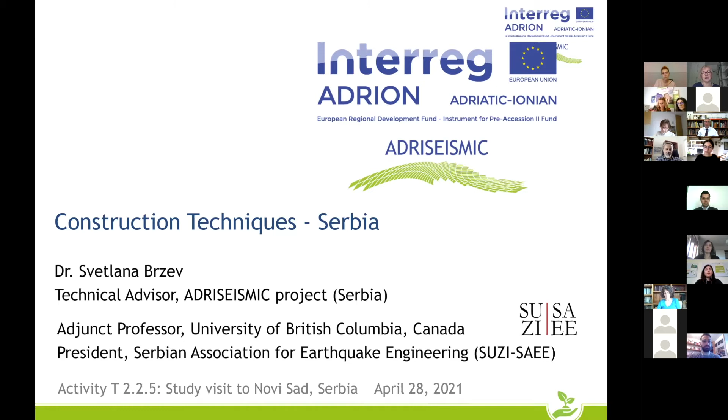So I will be giving a short presentation on an overview of construction techniques in Serbia. In this project, I'm mostly involved in the work package WPT2 and was contributing to the documents. The purpose of this presentation is to be short because we try to give longer details about Novi Sad, so this is a little bit of an overview; some of the content is already in the documents that have been published by the project.

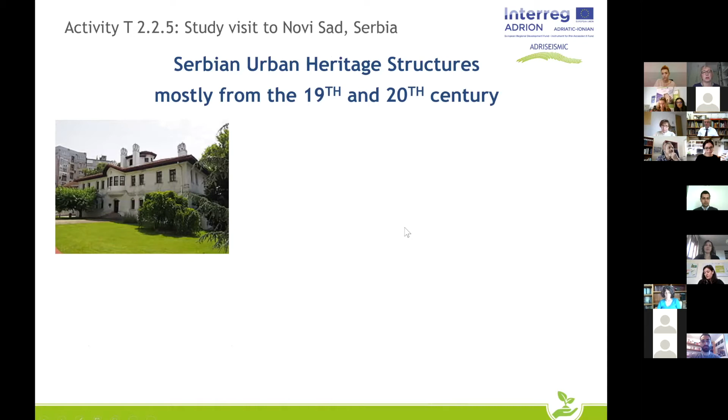As far as Serbian urban heritage structures are concerned, they date mostly from the 19th and 20th century. There are some examples of older buildings, but most of them were demolished, because Serbia has a rich cultural heritage, but also a rich heritage of wars and destruction in its history.

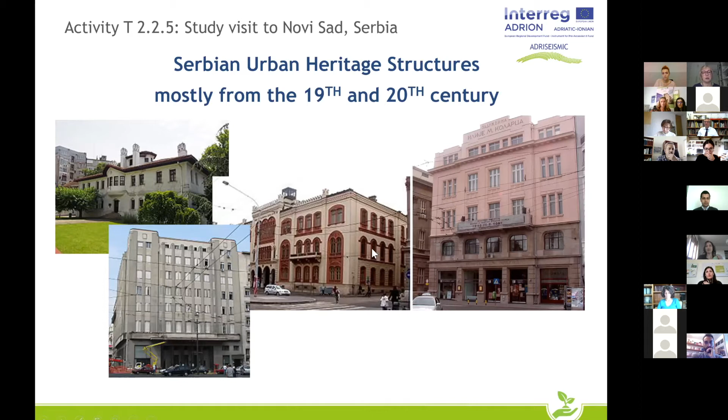I will just say a few words to give an introductory overview of building typologies and construction practices in Serbia. There were some really good projects which helped us a lot in this effort, such as the Tabula project, an international project with participation from Serbia. Colleagues from the Department of Architecture, University of Belgrade, prepared this for Tabula, and it is included in the WPT2 document. The construction practices were divided by construction periods, before 1919 and after 1919, and also by the type of construction.

If you look at the period before 1919, I would use this opportunity to give a bigger picture. For rural and also urban and suburban buildings, most of the population lived in single-family housing. That is a fact even today, because about 90% of buildings are low-rise, and they're mostly one- or two-family as far as residential buildings are concerned. There were also freestanding buildings built in the 19th century or beginning of the 20th century, and houses in a row, but mostly they were low-rise buildings up to 2, 3, 4 stories, not more. So these are the heritage or historic buildings from that period.

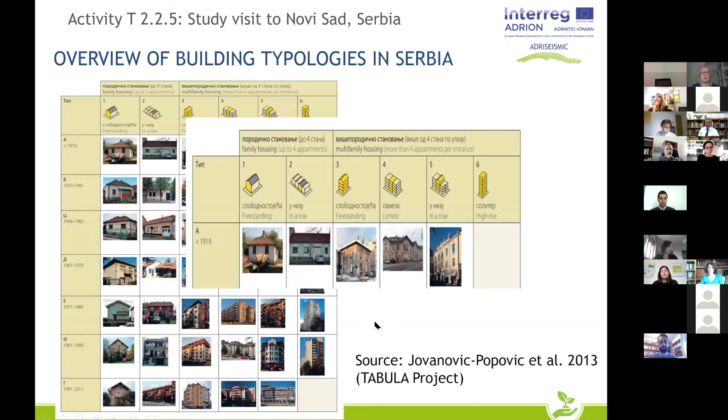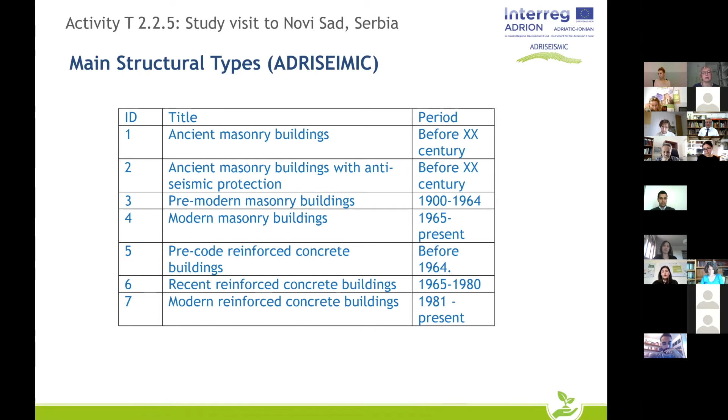The Tabula project was focused mostly on residential buildings, so that is not necessarily the focus of this project, but it gives a big picture of these construction techniques. Going back to the Adriseismic project and the classification of main structural types, there were 7 types: the first 4 are related to masonry buildings, and the last 3 to concrete buildings. I'll give a little bit of overview and examples of buildings from these types; most examples are from Belgrade, not Novi Sad.

Ancient masonry buildings are all those constructed before the 1900s, and in that period the use of load-bearing masonry was of course prevalent. There was use of earthen construction, but not adobe; it was some form of rammed earth or other type of earth construction. Brick masonry construction started to be used in Serbia around the 1850s; the first applications of brick masonry and brick manufacturing in Serbia date back to that period.

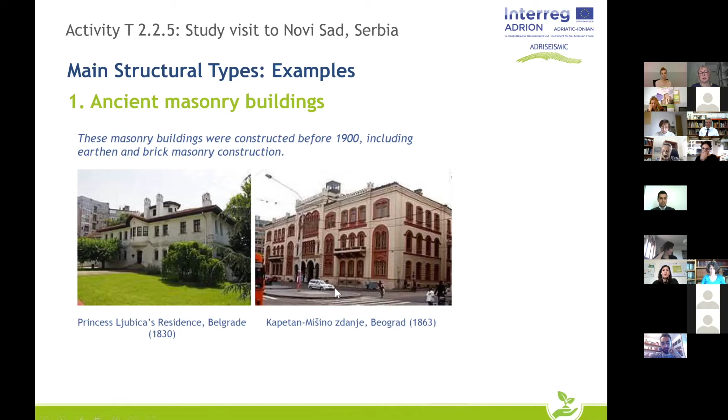So both of these buildings are in Belgrade. Talking about ancient buildings with anti-seismic protection, that is a very interesting topic, and of course it rings lots of bells when you are in Italy, because there were lots of examples of buildings of this type. In Serbia, there are not too many examples, in the sense that they have been in Italy, with the use of iron ties or metal ties.

This is an example as a part of restoration of the monastery Žiča, which is close to Kraljevo, and Kraljevo was affected by the 2010 earthquake of magnitude 5.5. So this was installed not in the original monastery, but as a part of restoration or retrofitting after the earthquake. This is a brick masonry building. Most monasteries in Serbia are brick masonry structures, and there are many very nice and interesting monasteries which are heritage structures.

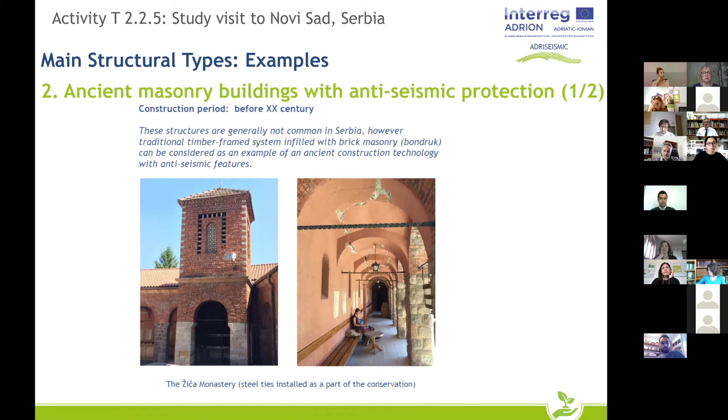So the only type of older construction or technology that we could qualify as anti-seismic protection is this technology of Bondruk. This was imported to Serbia from Turkey by Ottoman rulers. Serbia was ruled by the Ottoman Empire for 4 centuries, between the 15th and 19th century. So they imported this type of wooden construction that was filled with bricks or other filler materials. And this type of construction performs relatively well in earthquakes.

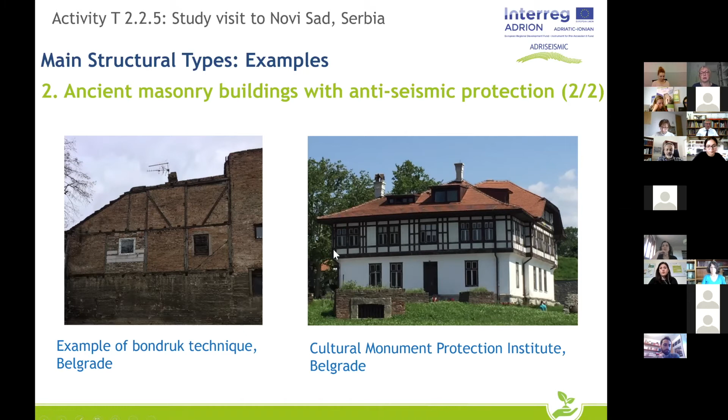So these are examples. This is actually my neighborhood in Belgrade, where modern buildings are present, but there are some old buildings with this Bondruk style technique. You can see these wooden elements, and then these are bricks. And this is the headquarters of the Cultural Monument Protection Institute in Belgrade. They're in charge of protecting all cultural heritage in the city, and this is one of the best spots in the city, in Kalemegdan Fortress, and the building also has elements of this wooden construction combined with masonry.

Pre-modern masonry buildings we classify up to 1964, when the first seismic code of the former Yugoslavia was published; Serbia, as you know, was a part of Yugoslavia at that time. So these buildings are load-bearing masonry construction, massive structures with relatively thick walls, brick masonry, and without any seismic provisions. Floor systems varied; from the 20th century, concrete floor systems were used in Serbia for this type of buildings, like the one that's shown here.

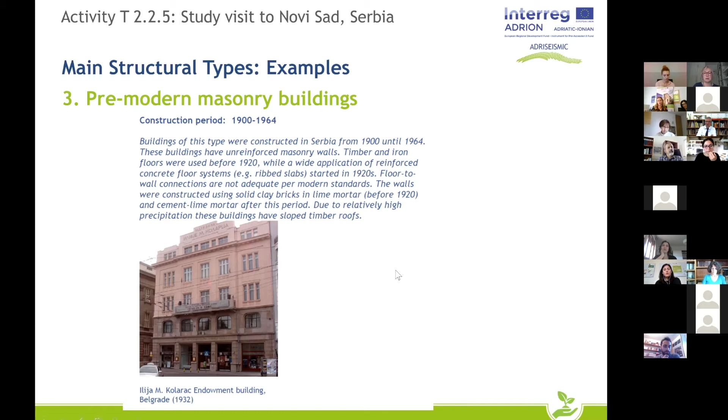This is actually a concert hall in Belgrade, used for classical music, and it was an endowment by one person, Ilija Kolarac. I'm not sure what was the initial intended use. It was constructed in 1932. It is an example of many similar buildings in the center of Belgrade, around urban squares. So anyways, this is just one building of this type. This is all for masonry buildings. And then after 1964, of course, we have modern masonry buildings with reinforcement, and they're not covered here.

So, pre-code reinforced concrete buildings. The beginning of concrete construction in Serbia is around the 1900s. In fact, the first application was in the National Museum in Belgrade, but it is not the load-bearing structure. It is a floor system, which was made of reinforced concrete in 1903. And subsequently, you can see the height is 3 to 4 stories, and a bit taller building is Hotel Moskva, which was built around 1908, a few years later. It has concrete floors, but also some concrete walls, so it has concrete vertical elements. So this is probably the first structure in Serbia with vertical concrete elements.

And it has a very interesting history. It had involvement of Russian architects; that's why it's called Moskva, which means Moscow. It was sponsored by the Russian Insurance Society. So their architects and engineers were involved in combination with Serbian architects and engineers.

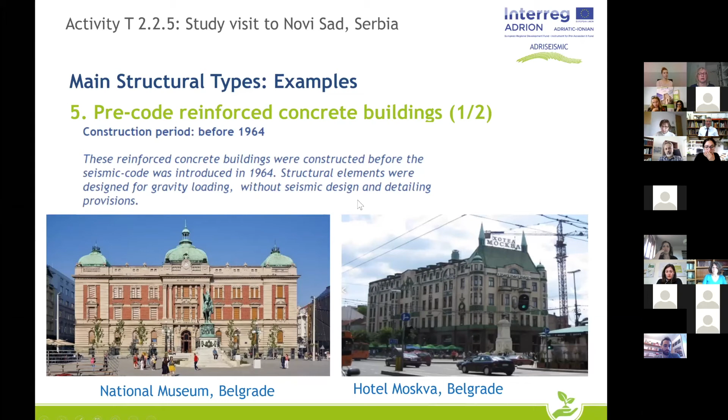So then more modern, but also older buildings, which are considered as heritage, are, for example, the Ethnographic Museum in Belgrade, from 1935, which was actually built as a stock exchange. It is at a beautiful square called Studentski Trg, Student Square in Belgrade. And also around that same square, there is a building of the Faculty of Math and Science at the University of Belgrade, which is, I would say, a typical building of the 1950s. Both are reinforced concrete buildings. So these are samples of different eras of the application of concrete construction, but both of them are before 1964.

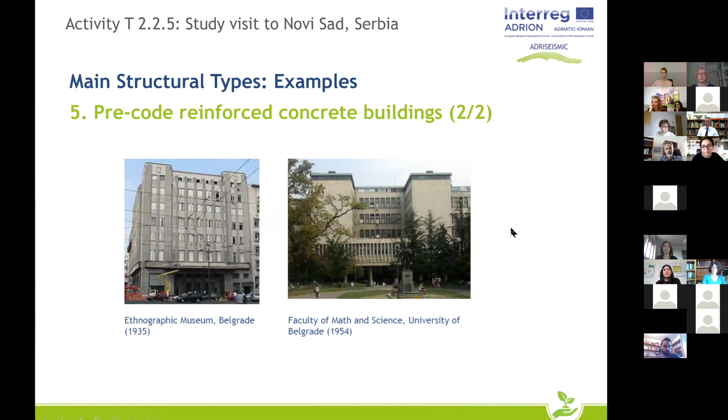More modern concrete buildings look different. Of course, this is an example again around the same square, which is called Student Square, in the center of Belgrade.

This is the Faculty of Philosophy, Department of Philosophy, University of Belgrade. So it is like a complex of buildings, and it is concrete frame construction with infills built in the 1970s. So it is typical architecture from the 1970s in Serbia. It was constructed after the first code was published in 1964. So it does have some seismic provisions, but at a lower level than after the 1980s.

So this is all I'm presenting. In fact, I picked a few periods that I thought are interesting to show. These examples are from Belgrade, but similar examples could be found in other Serbian cities which are of interest to this project. Of course, Novi Sad, but also Niš, Kragujevac, and maybe some others.

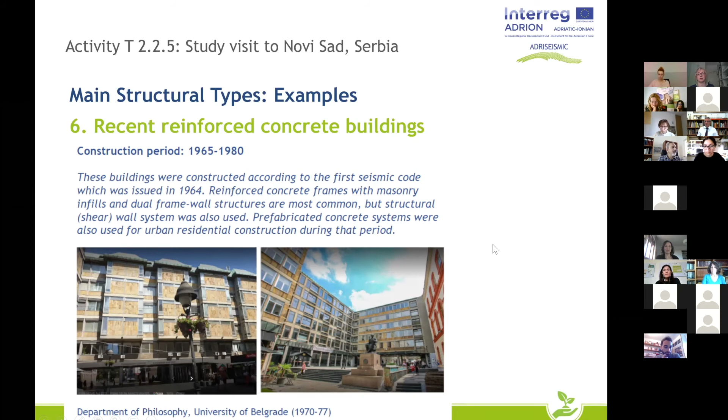So this is an overview of building typologies. I'm not doing an overview of, let's say, wall construction techniques or floor construction techniques. This could be a very long lecture in that sense, but we will illustrate that on the example of these Novi Sad buildings. And of course, more details about that are given in the document that was recently prepared.

Congratulations to the team, Georgia and colleagues, for putting it together. It is a very comprehensive document. So section 4.4 from Serbia documents all the construction techniques for other aspects, as I mentioned.

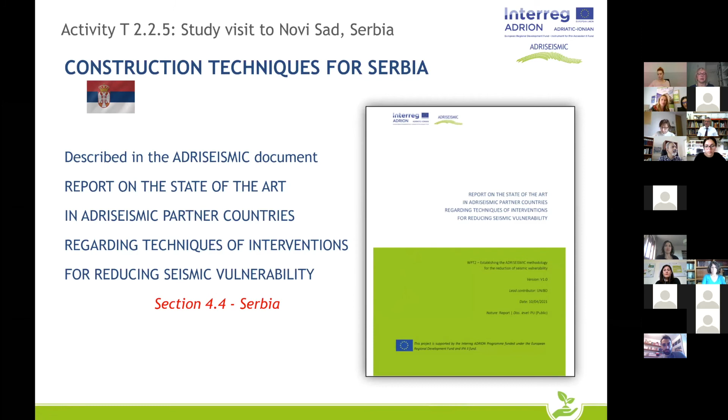What I would like to end this presentation with is the seismic hazard. When considering any intervention, or even thinking of intervention, we need to consider the level of seismic hazard that we have at a particular site. So Serbia, even though it is adjacent to Romania, and also to Croatia and Montenegro, which all have more frequent earthquakes, particularly Croatia recently, has, at least officially according to our seismic maps, significantly smaller hazard.

So both Belgrade and Novi Sad are shown here. And you can see the arrows, the black one for Novi Sad, the red one for Belgrade. So this is a zone with seismic hazard acceleration level of 0.1 g. That is for the seismic hazard level that is considered by Eurocode 8. That means 475-year return period earthquakes.

There are some pockets in Serbia. If you look at the very bottom, maybe you cannot see it, in the south, there are some which have higher accelerations of 0.2 or even 0.25, but they are very few territory-wise. It's small and it is not an urban area. So most urban areas would have this relatively small hazard.

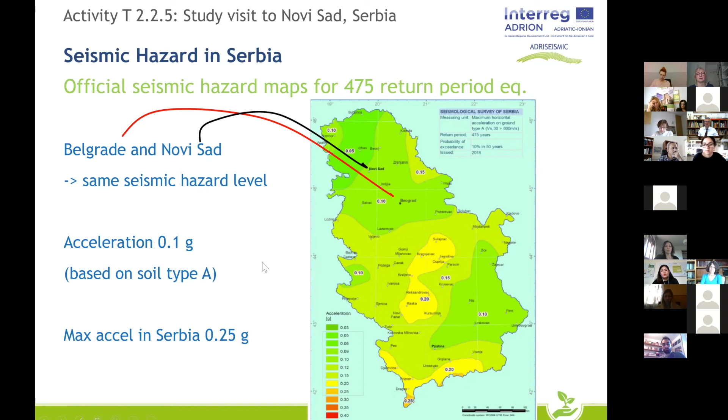It does not mean that earthquakes do not happen, but that may also be a reason for less attention to earthquake-related issues in Serbia. It is not an excuse, but it is certainly a fact that earthquakes do remind us of the need to do something. So it is wonderful that this project does it, to help us protect the heritage for future earthquakes.

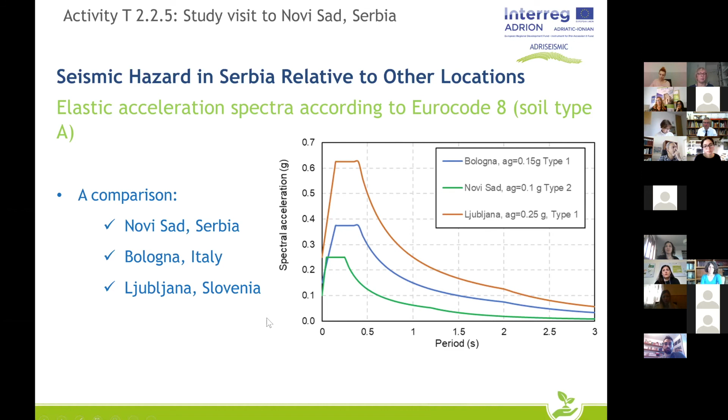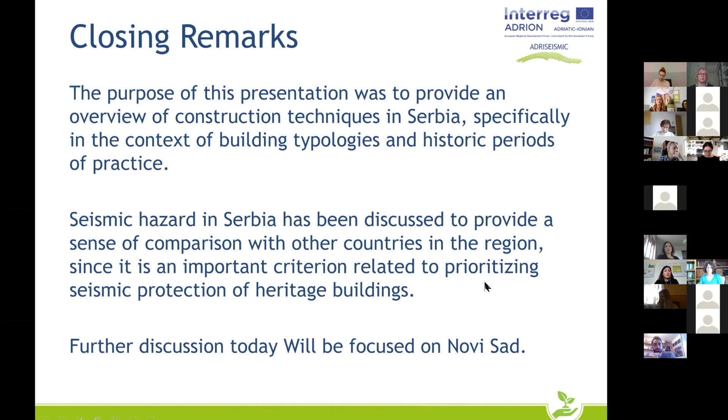So as a closing remark, the purpose of this presentation was to provide an overview of construction techniques in Serbia, specifically to give a context of building typologies and historic periods of practice. And seismic hazard has also been discussed briefly to provide a sense of comparison with other countries in the region, since hazard is an important criterion for prioritizing seismic protection of heritage and all other buildings for that matter. Further discussion today will be focused on Novi Sad. So this was a general introduction to Serbian construction practices and a short background.